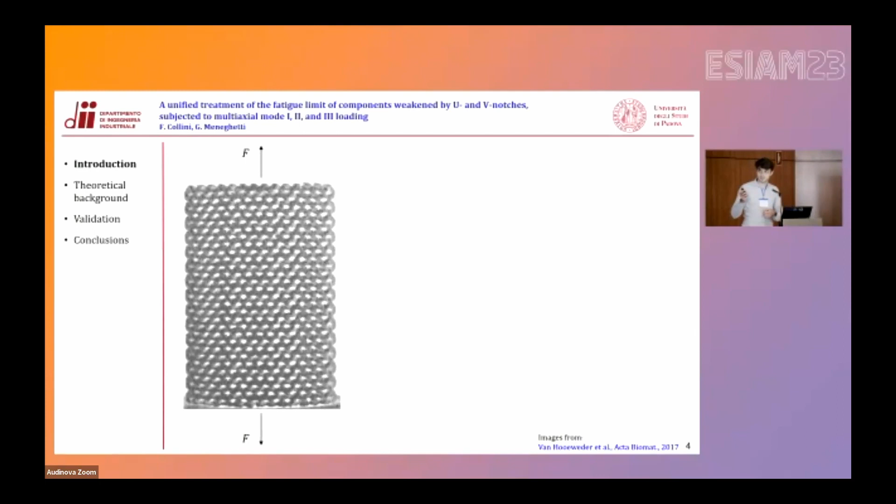And lastly, the validation of the proposed equations against the experimental data coming from the literature and the conclusions. So starting from the introduction, consider a generic lattice structure subjected to a set of remote loads as schematized in this slide. If we look closely at the lattice structure on the scale of individual unit cells, we can see that due to the porous nature of lattice structures, they are inherently notched, resulting in severe stress concentrations at the nodes, which are characterized by the presence of multi-axial stress fields ahead of such nodes. And this is very interesting because it is independent of the remote loading conditions.

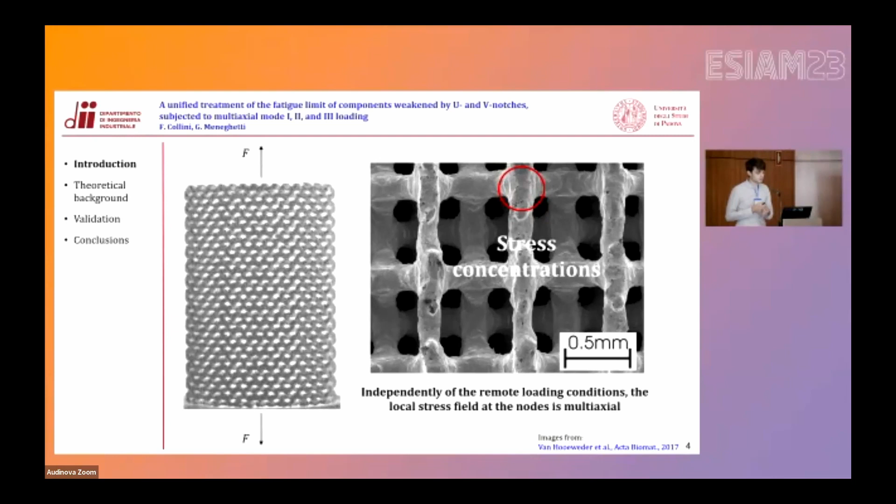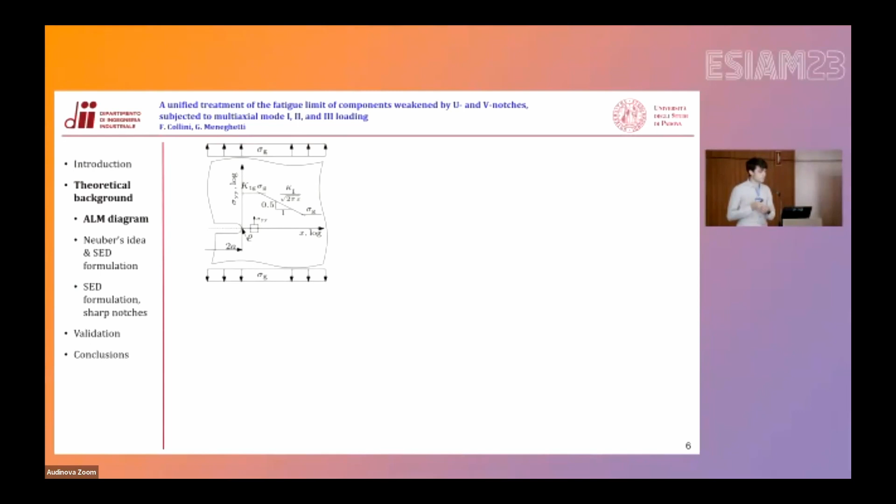So moving on to the theoretical background, consider a generic notched specimen subjected to a remote stress field of amplitude sigma g, of size 2a and notch tip radius rho. If we plot the opening stress field along the notch bisector in a bi-logarithmic scale under the hypothesis of linear elasticity, we obtain the schematic stress field shown in the figure, which is characterized by three different regions. The first, dominated by the KTG, which is the theoretical stress concentration factor.

Then, if we move along the notch bisector, we encounter the notch singularity region, which is dominated by the stress intensity factor K I with a singularity exponent 0.5, before eventually asymptotically reaching sigma g, which is the remote stress field. Changing the notch tip radius, the stress concentration factor will move up and down, while changing the notch size, the singularity region will move to the left or to the right. So we can expect different fatigue strength for different combinations of the notch size and its notch tip radius.

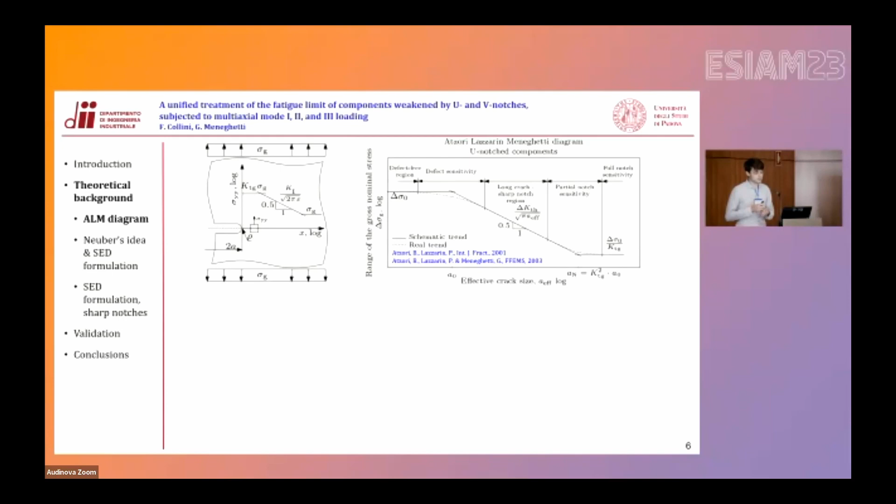In general, it is common knowledge that the larger the notch and the more acute the notch, the lower the fatigue limit. However, the relationship is far from that straightforward and can be really comprehensively analyzed in an Atzori-Lazzarin-Meneghetti diagram, where on the x-axis we have the effective crack size or effective notch size, and on the y-axis we have the fatigue limit.

The curves you see plotted in this diagram are obtained by changing the size of the notch in geometrical similarity. So by moving to the right, the ratio between the notch tip radius and the notch size is kept constant. We can see that inside a single design curve, different regions can be identified, which are related to different fatigue behavior of notched components, each of which is due to different physical phenomena. And it is very interesting that a single design curve can summarize all these different fatigue phenomena.

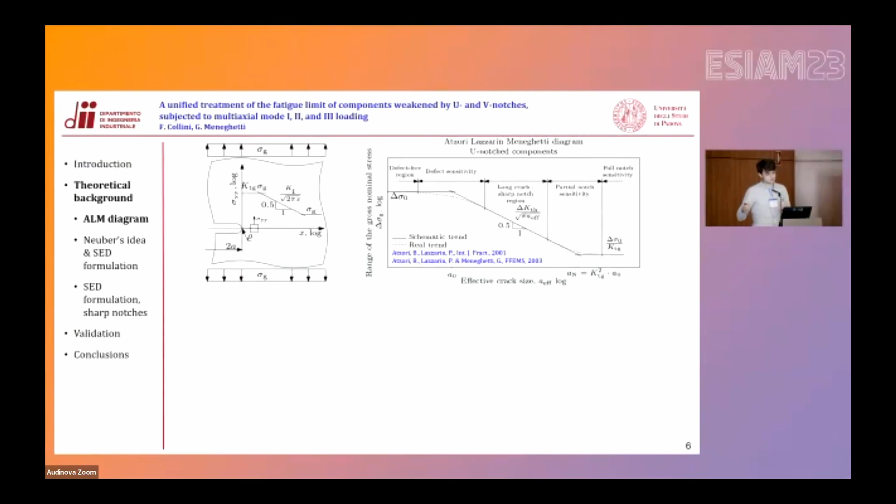Similar results can be obtained for V notches, where the only differences are related to the stress singularity exponent, which is no longer 0.5, but changes between 0 and 0.5, and in the sharp notch region of the Atzori-Lazzarin-Meneghetti diagram, where for different notch opening angles, we obtain different design curves. However, for a fixed opening angle, there is only one single design curve that can be adopted across the whole range of notch sizes.

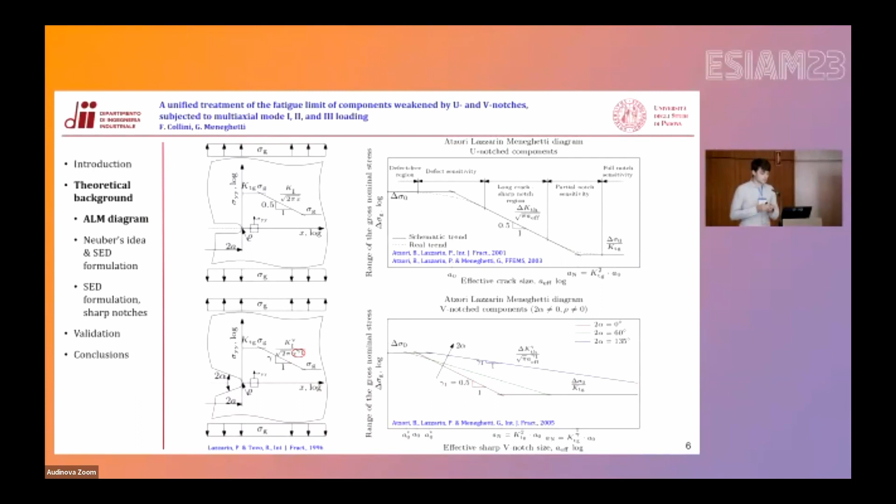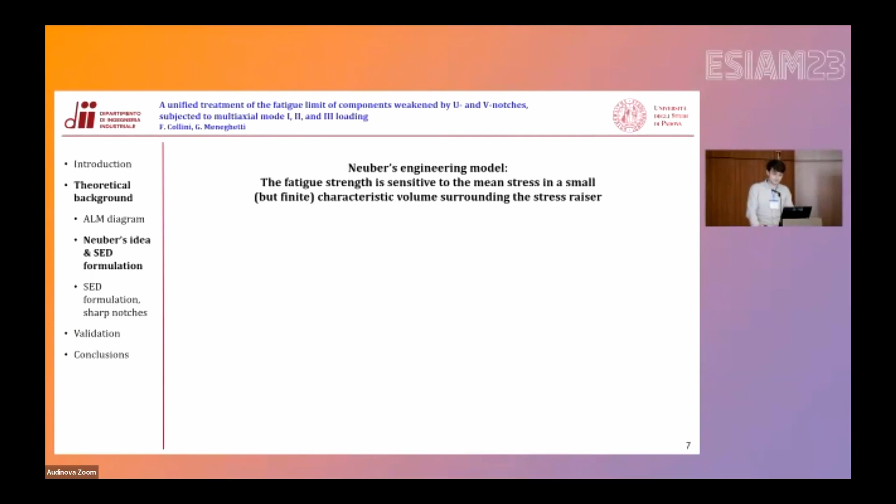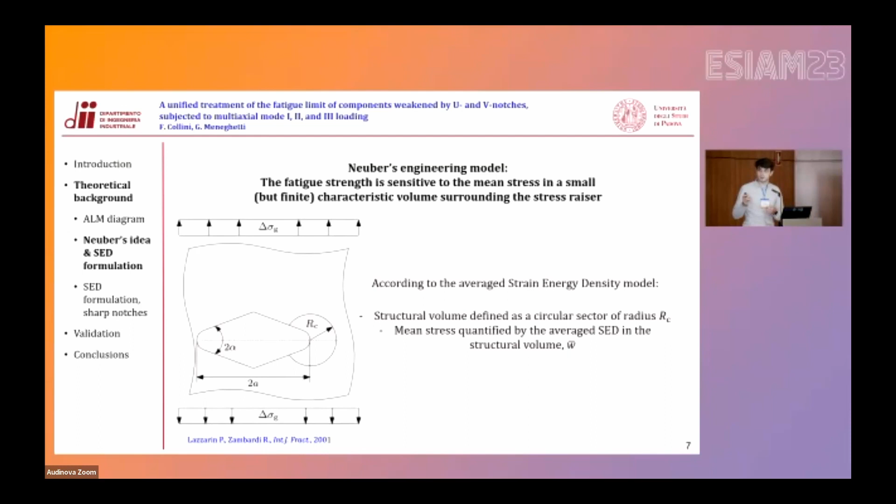And I believe that this is the beauty of this diagram, because by being able to summarize all these different behaviors, it suggests to the engineer that there exists a single material model that can be used across all the Atzori-Lazzarin-Meneghetti diagram. A possibility for that is the average strain energy density model, which is based on Neuber's engineering idea, according to which the fatigue strength is sensitive to the mean stress in a small but finite characteristic volume surrounding the stress raiser. With reference to the figure sketched on the left, according to the average strain energy density model, the structural volume is defined as a circular sector of radius RC, while the mean stress can be quantified by the average strain energy density inside such structural volume.

I want to show you in the next two slides how with this very simple model, it is possible to describe all the Atzori-Lazzarin-Meneghetti diagram, starting by analyzing the full notch sensitivity region, which is for very large and blunt notches. If we analyze the stress field ahead of the notch tip for such a notch, we can see that inside the structural volume I chose schematically, the stress field is dominated by the stress concentration factor KTG. And so we can expect this combination of notch and structural volume to fall in the full notch sensitivity region, since it is dominated by the KTG.

If we now consider a smaller notch obtained in geometrical similarity, now the stress singularity field shifts to the left, and we see that the stress field inside the structural volume is dominated by the stress intensity factor. And so we can expect that this notch will fall in the long crack or sharp notch region of the Atzori-Lazzarin-Meneghetti diagram.

For a more detailed analysis, I suggest you read this article from 2005 published by Professor Lazzarin and Professor Berto, where they analyzed with the strain energy density model all the Atzori-Lazzarin-Meneghetti diagram.

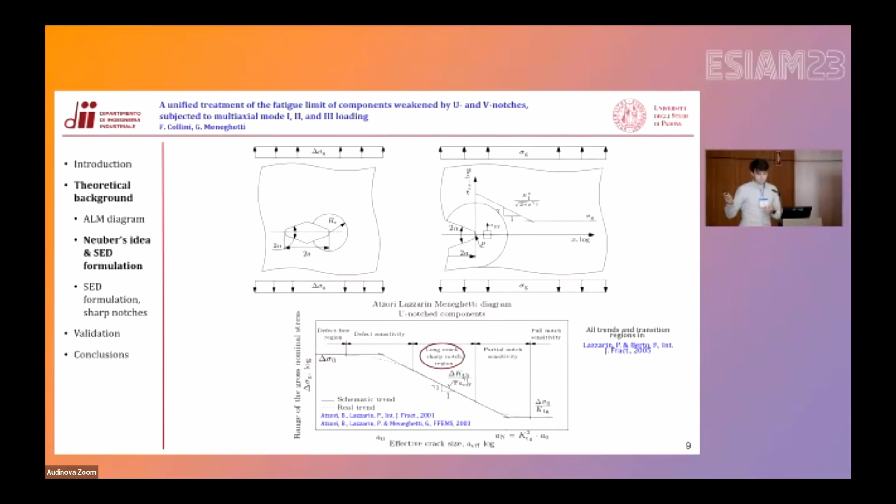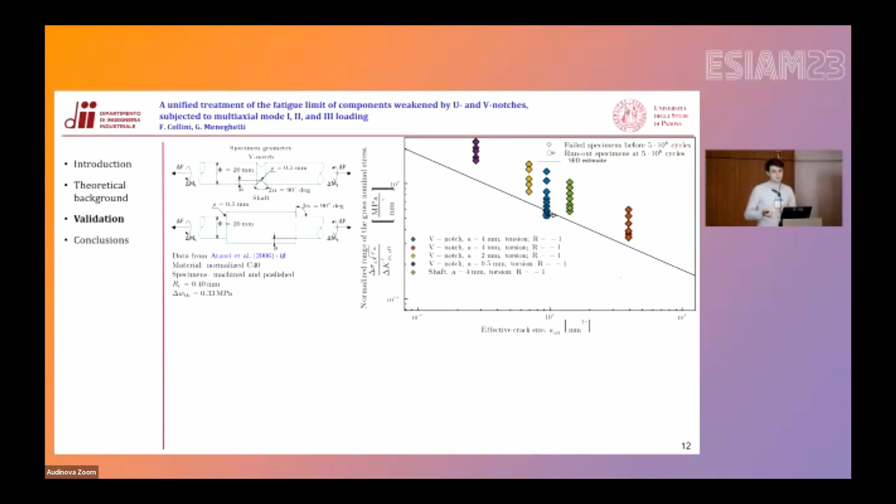By comparing the numerical prediction, that you can see as a black line in an Atzori-Lazzarin-Meneghetti diagram, against the experimental data, we can see, starting from the tests obtained for only tension loading for the V-notched specimens, a very good agreement between experimental and numerical data. Moving on, for the torsion loading conditions, again, we see that the prediction is coherent; also there are no data falling below the prediction line. And lastly, also for remote multi-axial loading conditions, again, there are no data falling below design, and so we can say that this model is able to predict the fatigue limit for a wide variety of local stress fields. Here you can see in more detail the comparison for all the different multi-axial loading conditions.

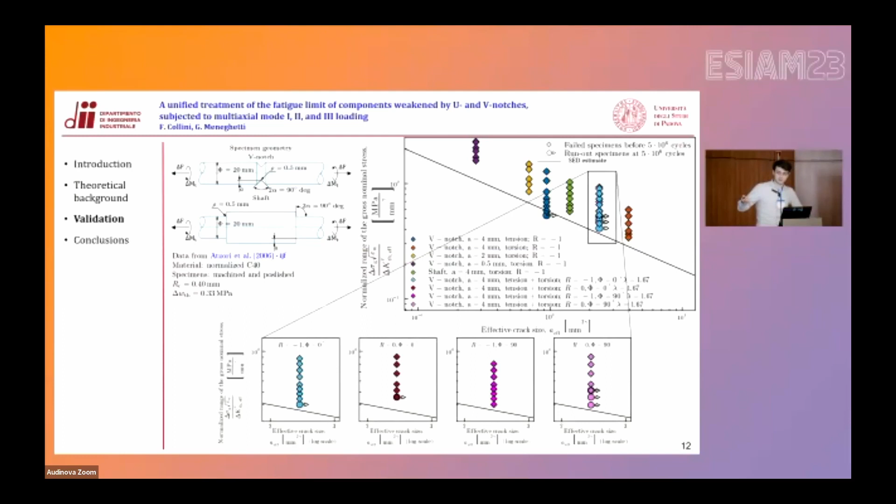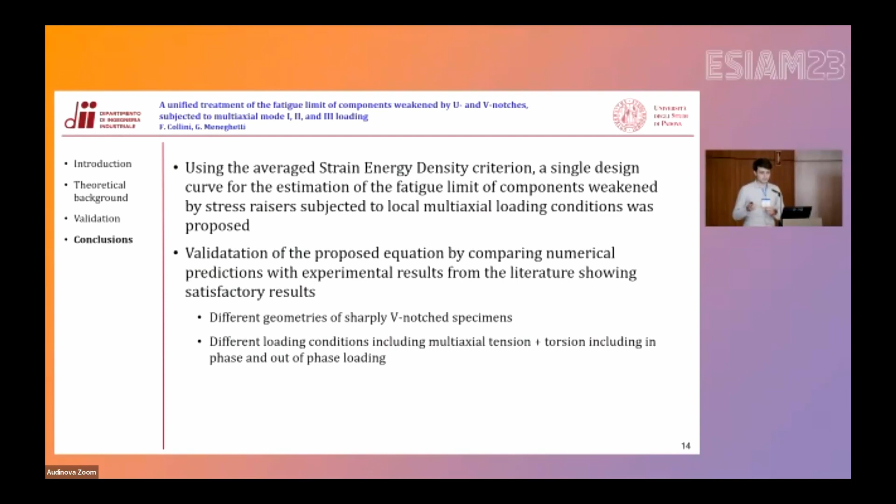And so in conclusion, using the average strain energy density model, it was possible to obtain a single design curve to predict the fatigue limit of any sharply notched component subjected to any remote loading conditions. Oh, sorry. And by comparing the experimental results with the numerical predictions, it was shown that we obtained very promising results for different geometries of sharply notched specimens under different loading conditions, including multi-axial tension plus torsion, both in phase and out of phase loading conditions.

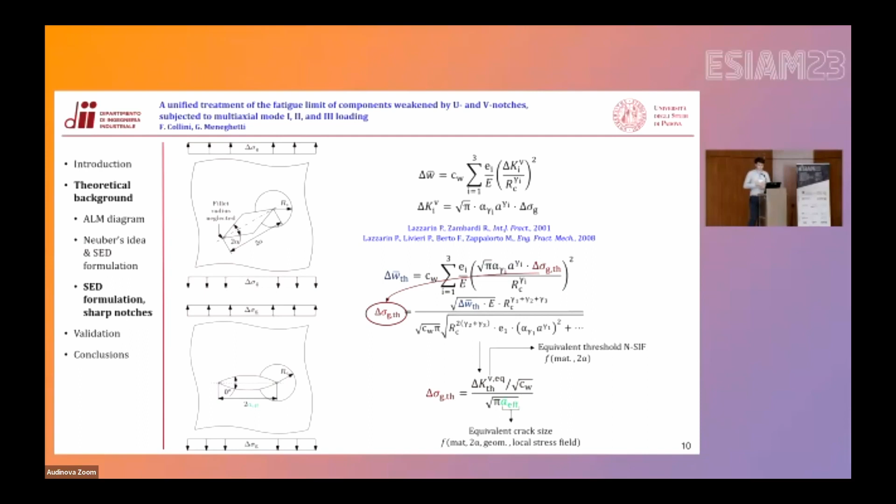So the proposed equation, as shown in this slide, was obtained for sharply notched specimens, and it would be sufficient to estimate the notch stress intensity factors obtained by applying the remote loads. And so by computing the contribution of mode 1, mode 2, and mode 3, we can obtain a different value of this a effective. Okay, so it could be very general then. There are the approximations related to the validity of the strain energy density model. However, at least from an analytical perspective, it's extremely robust. Yeah. So even for the cases where we expect coupling, we can consider all terms. Yes, absolutely.